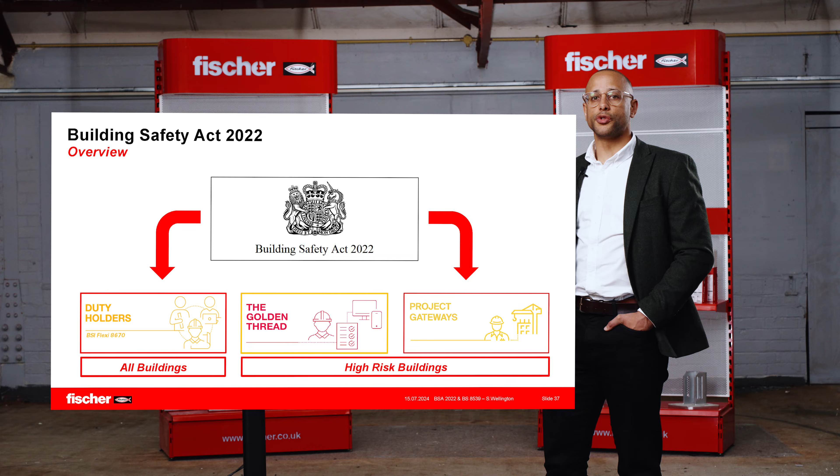Today, we're going to concentrate on 3 key components of the Building Safety Act: duty holder competency, the golden thread, and project gateways. The duty holder competency requirements will apply to all buildings, whereas the other 2, the golden thread and project gateways, will only apply to higher risk buildings.

Overseeing the introduction of the Building Safety Act and the required legislation is the Building Safety Regulator. This will be a division of the Health and Safety Executive and will be responsible for the implementation and enforcement of all the new legislation under the Building Safety Act.

The first of the recommendations we will look at is the golden thread. Following the Grenfell disaster, it was very difficult for the investigators to work out exactly what had gone wrong with the building that led to the tragedy.

The reason for this is that all the safety critical information regarding the building was held on different platforms by different companies, with no one body overseeing all the information. So the purpose of the golden thread is to avoid this happening again. The principal contractor will be responsible for collating all of the safety critical information regarding the design, installation, and certification of all safety critical applications for a construction project.

Next, we'll look at the introduction of project gateways. These project gateways are intended to be checkpoints in a project's lifecycle, and any project that started after October 2023 will be subject to the new gateway procedure.

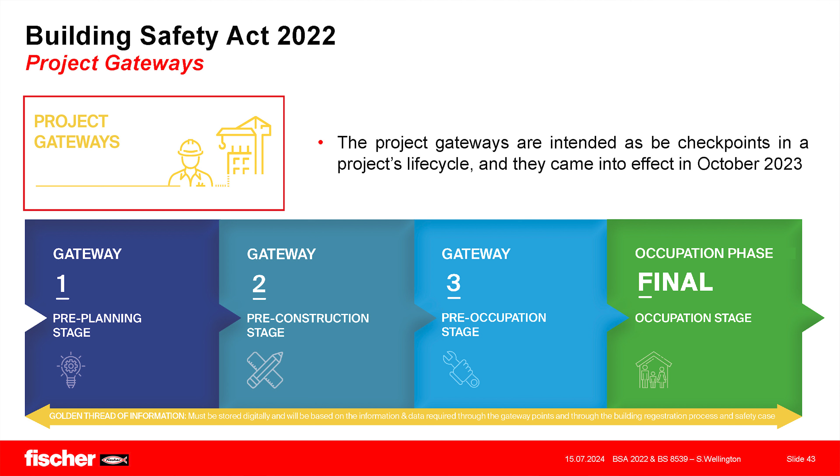Currently in construction, we utilize a project lifecycle of multiple stages. However, it is possible for differing stages to be occurring at the same time. For example, there could be stage 4 design of the building services still being undertaken, with that design not being fully finalized, while at the same time, groundwork, such as the foundations and piling work, are occurring on site.

The big change under the new Building Safety Act is that all detailed design of safety critical applications will have to be completed and approved by the Building Safety Regulator at Gateway 2 before a spade can go in the grounds. This means that there will be greater engagement with secondary contractors and secondary designers at stage 3 and stage 4 of a construction project.

Moving on to duty holder competency. This is another big introduction under the Building Safety Act, that all duty holders on a project will have clearly defined competency requirements set out for them. Under the Safety Act, there are 3 key duty holders, and that is the client, the principal contractor, and the principal designer. All required competency for various parties will be set out in the relevant framework documentation.

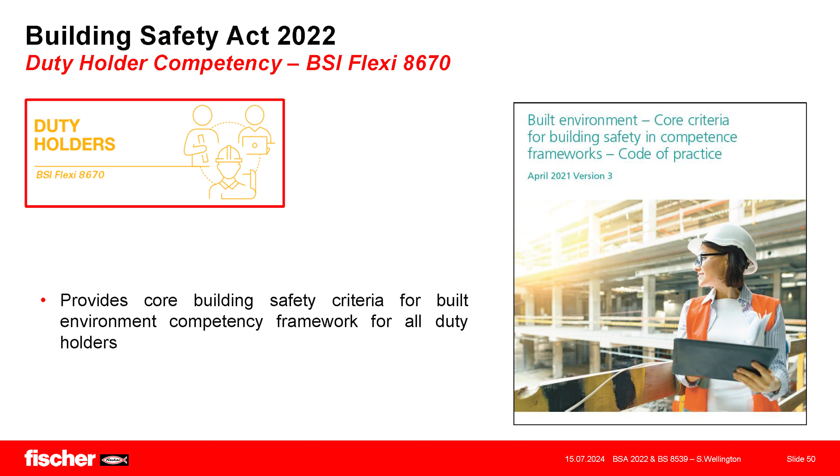The first one of these documents is BSI Flexi 8670, which sets out the core competencies for all working on a construction project. This has been followed up by the framework documentation for principal designers, and they have 3 key responsibilities when it comes to specification of construction products.

First one being the management of all design work for a project. Secondly, they will have to ensure design work compliance across the entire project, so they need to ensure that everybody is designing applications to the relevant design methods. And thirdly, they will be responsible for assisting provision of information to others to ensure that design work compliance. So this is a big change within the industry.

Next, we have the framework documentation for principal contractors. The principal contractor will be responsible for the management and supervision of all building work by adopting best practices.

The best way of achieving this is by following the relevant British standards for various applications on a construction project. Next, they will be responsible for the management of competencies for installers for all safety critical applications. This means contractors will need to develop methods of measuring the competency of installers working on a construction site. And thirdly, they will be in charge of the management of the golden thread.

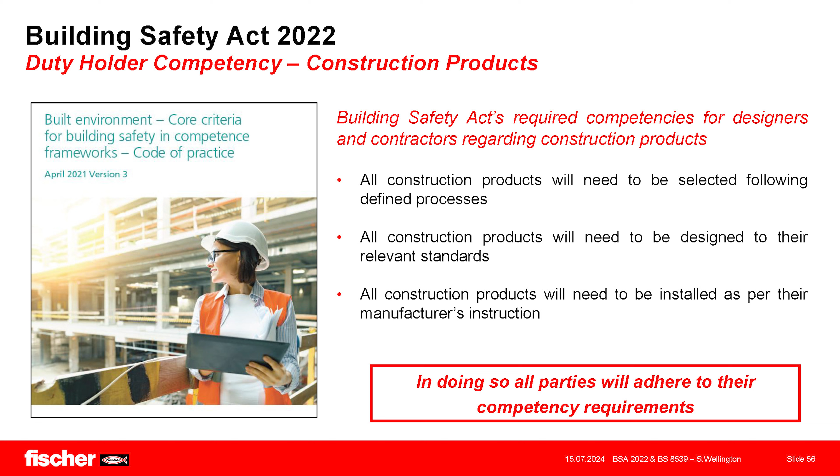Regarding the competencies for construction products, this information is held within BSI Flexi 8670, specifically in section 6.5 and table 5. There's a lot of information in there, but it can be summarized as such: in order to ensure all parties adhere to their required competencies under the New Building Safety Act, all construction products will need to be selected following the defined process. They will then need to be designed following the relevant design method for the application, and finally installed following the manufacturer's instructions. In doing so, everyone would adhere to the required competencies under the New Building Safety Act.

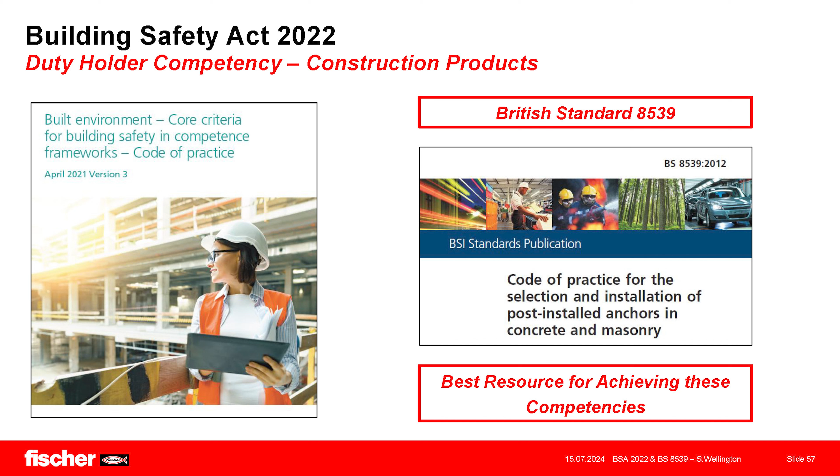And the best way to do that for post-installed anchors is by following British Standard 8539. This will be the best resource you have available to ensure you can adhere to your competency requirements.

Now, to quickly focus on where we are as an industry in regards to the Building Safety Act: as mentioned already, the secondary legislation came into effect in October 2023. And in February of this year, the main steering group behind the development of the legislation of the Safety Act published their latest report, and in it warned that the industry was not ready for full implementation of the Safety Act. There's still a lot of things we need to understand. And as Fischer, we're here as a resource for you to use to understand what you need to know around specification of construction products.

To summarize the Building Safety Act, you need to be aware of all the duty holders covered by the Safety Act and the required competencies of each of those duty holders. You need to know what information you need to submit regarding specification and installation of construction products into the golden thread. And you need to know what you need to achieve by each of the project gateways, specifically around Gateway 2.

I'd like to focus on the importance of post-installed anchors for a moment. We're under no illusion that post-installed anchors are one of the last things to be specified for an application on a project, and they are a low-cost item relative to the rest of the application. However, they have this annoying habit of being the items that keep the application in place and always need to have due diligence paid to them.

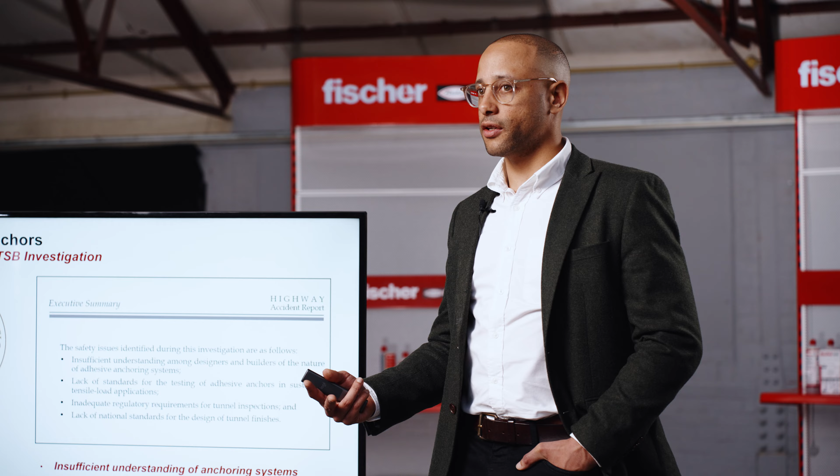Now, when the NTSB, the National Transportation Safety Board of America, investigated what had gone wrong, they quickly identified that the anchors utilized for the suspended ceiling had failed. The reasons for this were numerous and detailed in the report published a year later. The reasons for the failure included incorrect installation, the change of specification without approval, and even when issues were noted on site with the displacement of the anchors, there wasn't the due diligence given to investigate the cause of the problem, and therefore it was believed the problem had been fixed until the tragic accident.

So in the executive summary of the report, it simply stated that insufficient understanding of anchor systems led to the death of the driver of that car. So the importance of the British standard for post-installed anchors is to avoid tragedies such as the Big Dig and others that have occurred even in this country, even up to the modern day.

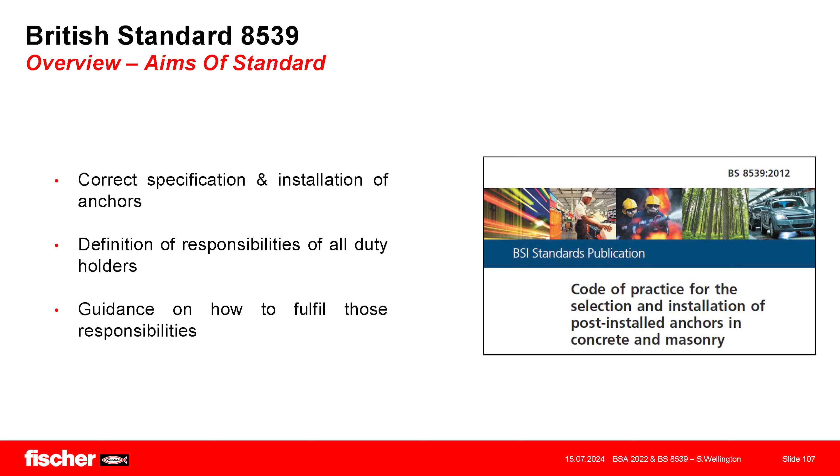So the use of such a standard can avoid these issues by ensuring correct specification and installation of anchors, clear definition of the responsibilities of duty holders. The standard will also provide guidance to the duty holders on how to fulfill their responsibilities. The key duty holders under the British standard are the specifier, the contractor, and the installer, with the contractor having overall responsibility for the installer.

Key points that all duty holders should be aware of: for any safety critical application, an anchor with a European Technical Assessment approval must be used. If there is any change to the specification, procurement, or installation of a post-installed anchor, then the original specifier or an engineer with access to the original design data must be notified and approve of the change.

Also, all duty holders should be aware of the information they are responsible to pass on to other duty holders to ensure the correct specification, procurement, and installation of anchors.

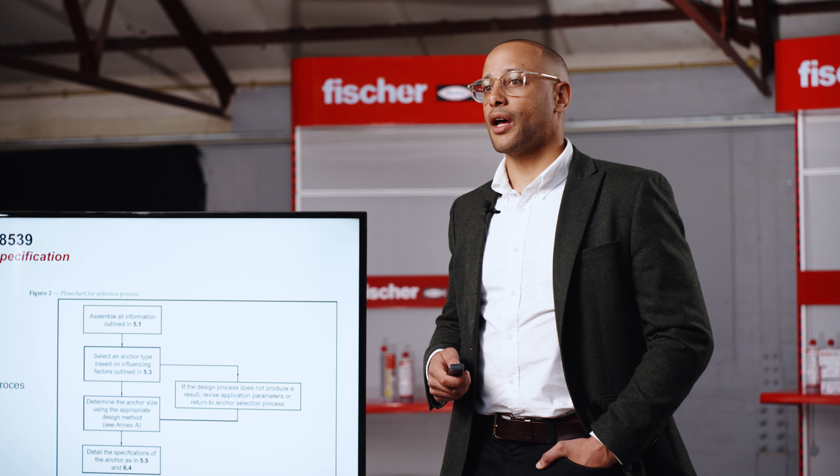Focusing now on specification. Within section 5 of the standard, it gives you all the information that you need to ensure that you specify an anchor correctly. As you can see here, it even gives you a flowchart on how to follow the specification process.

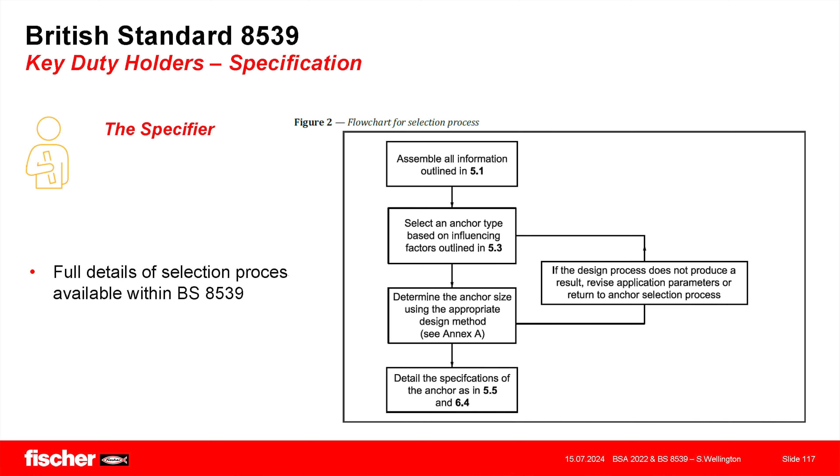If we focus on the first section of that, which is the information required for the initial selection of an anchor, as you can see, it is an extensive list. Now, we don't always get that information, but the more information specifiers can have from this list, the easier and quicker the job will be.

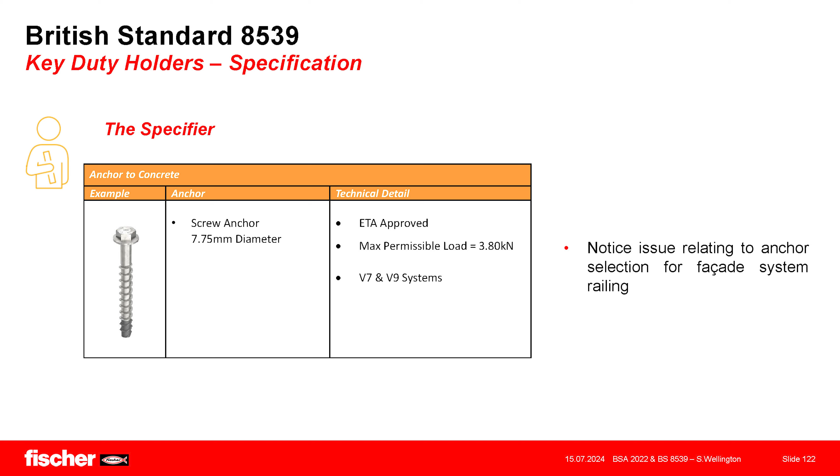So to highlight the importance of having as much of this information as possible, we're going to look at a quick example. Here we've taken this example from a facade railing system. For this particular system, the specifying engineer recommended the use of a 7.75 millimeter diameter screw anchor that was ETA approved and had a max permissible load of 3.8 kilonewtons.

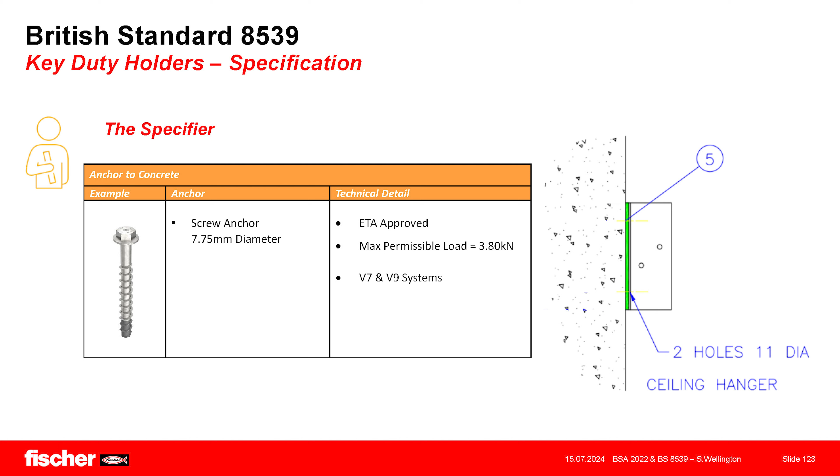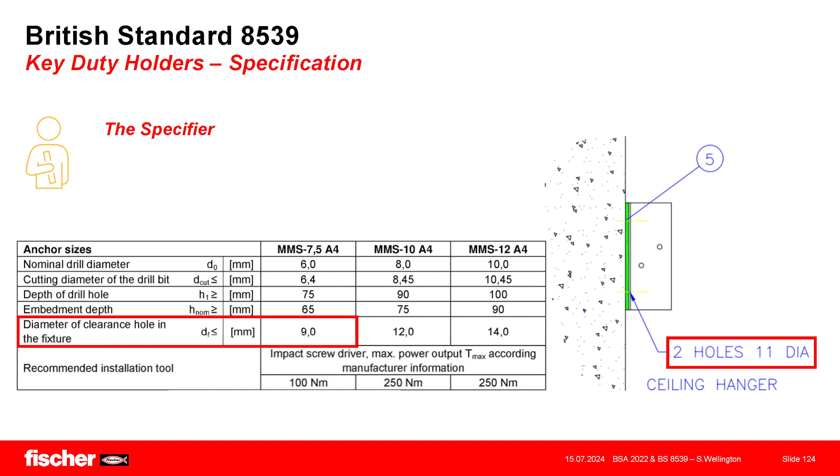However, the bracket that the anchor was to be installed into had clearance holes of 11 millimeter diameter. Now, this is a problem because if we look at the ETA approval for the anchor, for the 7.75 version, you can see highlighted here that the maximum diameter of clearance hole is 9 millimeters. This is to ensure that the load is transferred from the base plate to the anchor as expected under the Eurocode 2 Part 4 design methods.

So unfortunately, for this particular example, the 11 millimeter clearance hole was too large, and this is an example of incorrect anchor selection. Once the specifier has selected an appropriate anchor for design, they then need to work out which design method they should utilize for the connection in question.

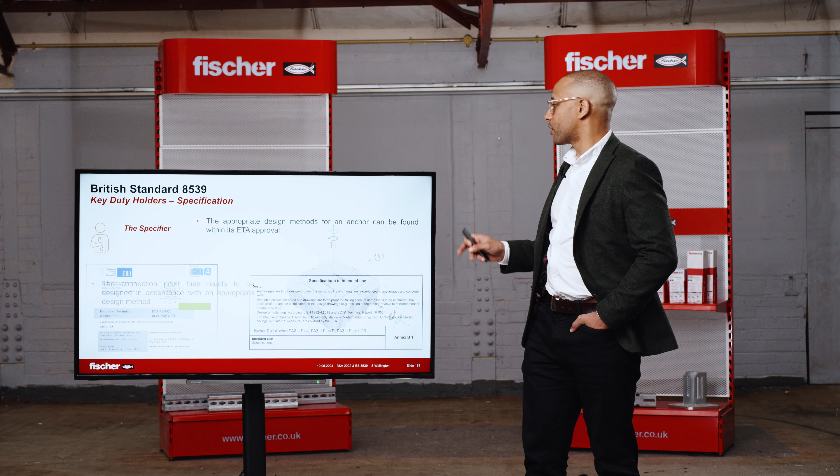The quickest way of doing that is consulting the ETA approval of the anchor and looking in the specification of intended use section, where it will always give what design method the anchor should be designed in accordance with. So here, we've got FAZ II Plus, and it's intended for design with Eurocode 2 Part 4.

And the easiest way to do that design is to utilize an anchor design software, such as Fischer's C-Fix Design Suite.

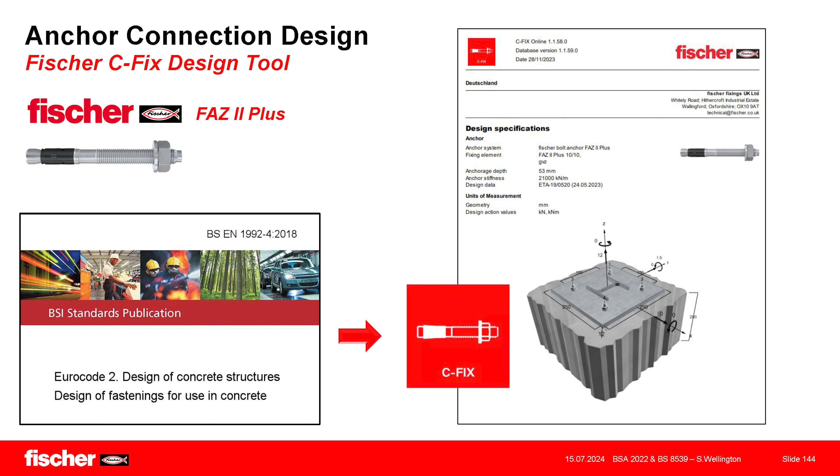Within it, you can design the anchor and then publish a design report, and this will be important for the Building Safety Act for that design work compliance, because within the report, it will state what ETA approval has been utilized for this anchor, so that's where the characteristic data used for design has come from, as well as detailing which design method the anchor has been designed with for this particular design.

Also within the report will be a full breakdown of the verification calculations for anchor failure.

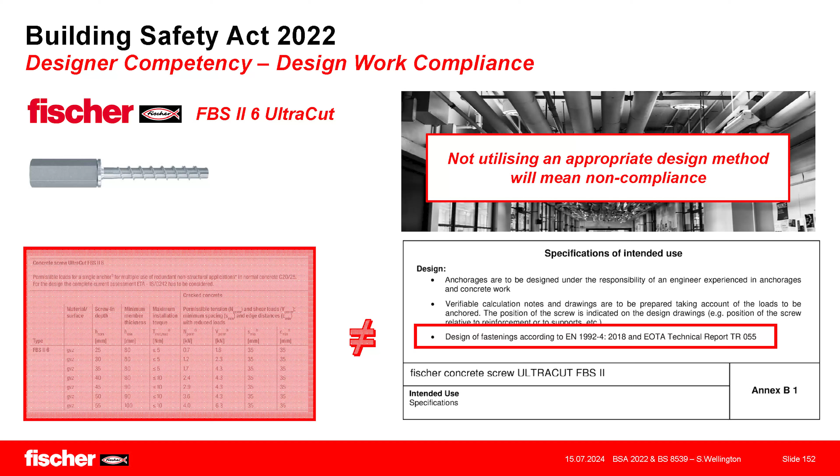What shouldn't happen is the use of load tables. Now, we publish load tables to help with the selection of the anchor, but not for design. The intention of them is to give you an idea of the load capacity that could be possible with the anchor in question. What should never ever happen is that justification for an anchor connection design be made solely on the basis of the loads given within the load table.

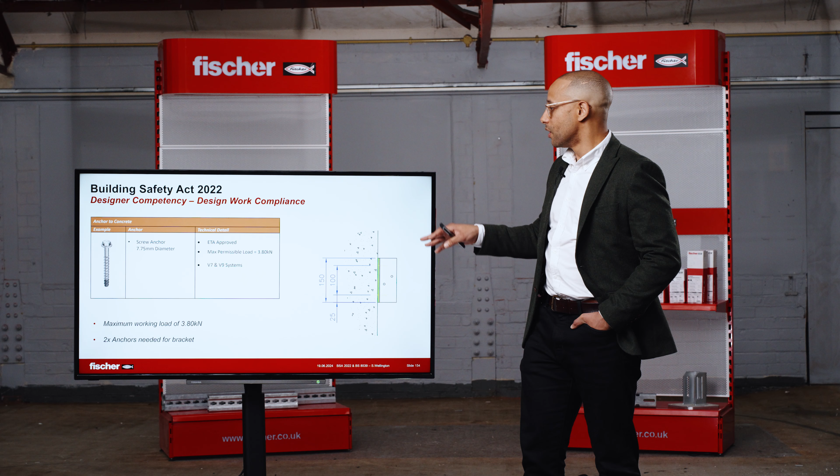Again, we will revisit our facade example, again with our 7.75 millimeter diameter screw anchor. As I mentioned before, the specifier stated that had a max permissible load of 3.8 kilonewtons, which they took from the load table for this specific anchor.

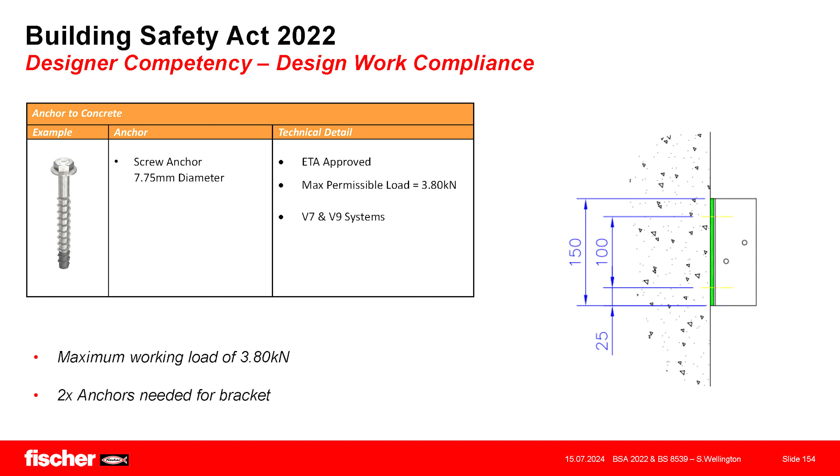And for the bracket that we're considering, there were 2 anchors to be used for that particular bracket. The first issue here is that the 3.8 kilonewton load that they have said is the max permissible load is only applicable in tension according to the load table and for non-cracked concrete only. But as we know, the assumption should be made that all concrete is cracked unless proven otherwise.

So as we can see, the specifying engineer worked out what load would be applied to the bracket, but instead of carrying out correct anchor design, what they did instead was simply times that max permissible load by 2, the amount of anchors they had in the bracket, and decided that that would be the maximum load capacity of the particular bracket, which unfortunately is incorrect.

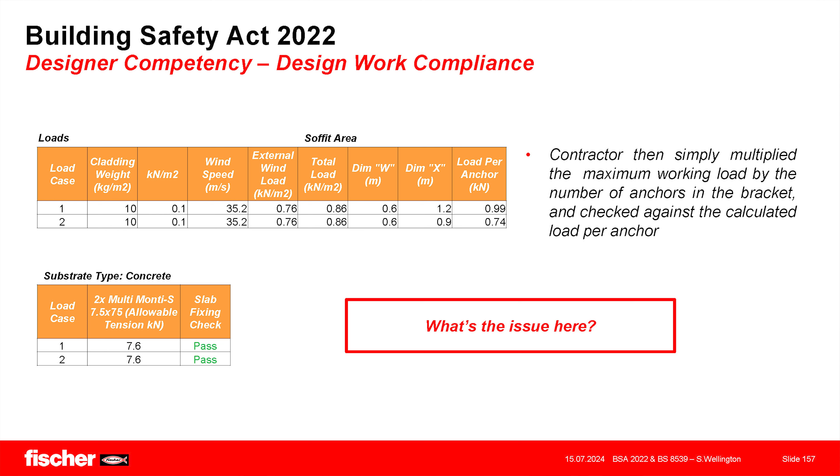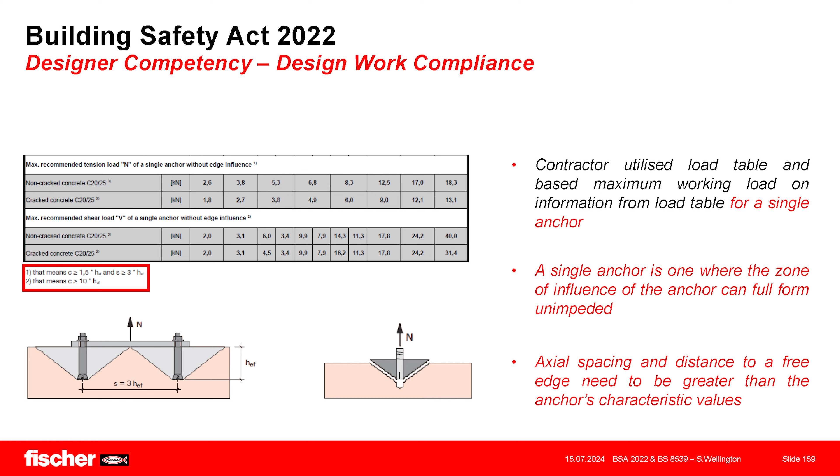Now, why is this incorrect? Because it doesn't take into consideration the fact that the anchors are closely placed to one another. So their zones of influence, this is the area of the concrete where it gets its load bearing capacity, will overlap, which will decrease the max permissible load of the anchor.

Unfortunately for the designer, as we can see again from the ETA, it states that its characteristic spacing, the spacing at which anchors can be considered as single anchors, is 3 times the embedment depth. In this instance, the embedment depth is 40 millimeters, so the characteristic spacing is 120 millimeters. As we can see here, the actual spacing for the bracket is 100 millimeters.

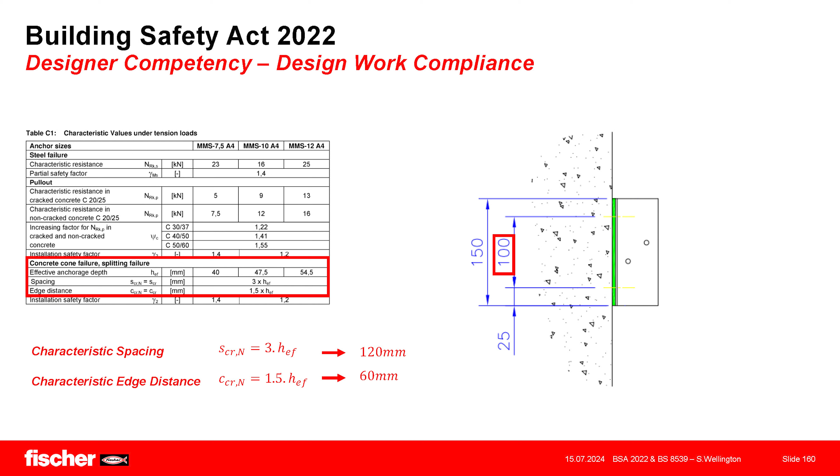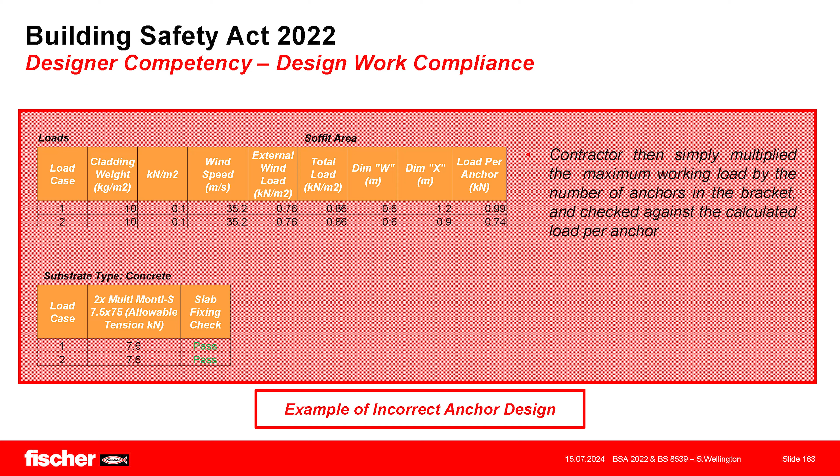So this has to be considered as an anchor group. As an anchor group, the zones of influence, as you can see in the figure here, overlap, and this is why we need to utilize correct design methodology to work out the actual load bearing capacity of the anchors, rather than simply timesing the max permissible load by the number of anchors in a bracket. So unfortunately for this specifying engineer, this is an example of incorrect anchor design.

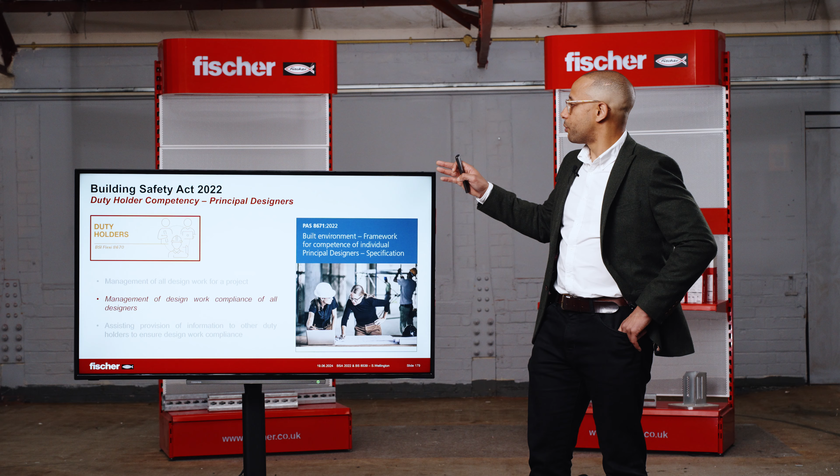Now, how does this tie into the Building Safety Act? Earlier we went through the principal designer's main requirements regarding their competency, and one of them was the management of design work compliance for all designers. So essentially, if the designer of that facade system had submitted that anchor design to the principal designer, it would have been rejected and they would have been asked to redo it utilizing the correct design method.

So we'll have a look at what design methods should be used for both concrete and masonry, the two main substrate types for post-installed anchors.

For concrete, this is managed by the European Commission, and as I mentioned before, the main design method is Eurocode 2 Part 4. There are various design methods under it, and it also covers dynamic, seismic, and fire approvals. A sub-design method is CEN Technical Report 17079, which looks at anchor redundancy for overhead systems. Finally, we have our own Fischer ENSO design methods, which are based upon FIB Bulletin 58.

A limitation of Eurocode is it allows for only 9 set anchor layouts, and there will always be a requirement for custom anchor layouts, and that is managed by the Fischer ENSO design methods.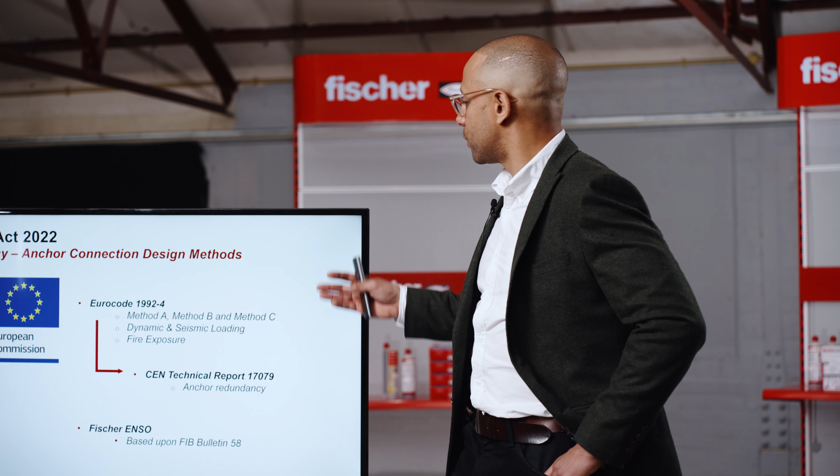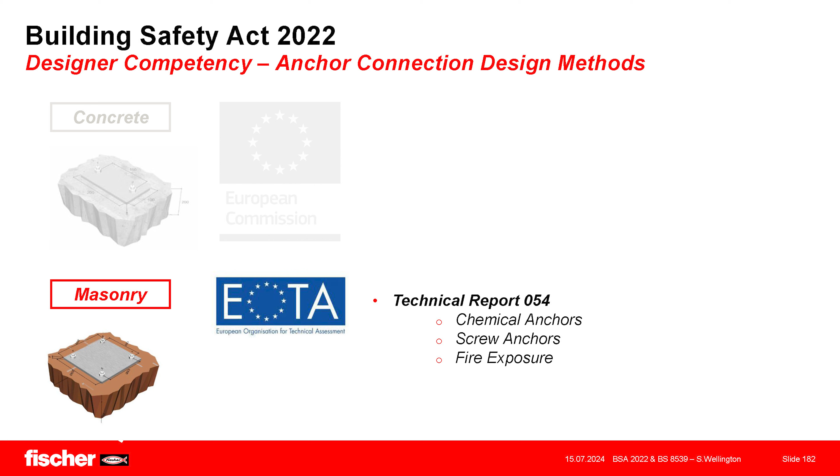Moving on to masonry, this is looked after by the European Organization for Technical Assessment, the body that issues the ETA approvals, and the design of masonry is covered in Technical Report 54, which covers design for screw, chemical, and fire.

Moving on to key duty holder responsibilities under procurement. The contractor has the main responsibility for procurement, as well as ensuring that the anchor is installed correctly. This is achieved by following the specifier's specification and anchor connection design provided to them, and then ensuring that the installer has all the correct installation equipment, as well as sufficient training on the installation of the anchor.

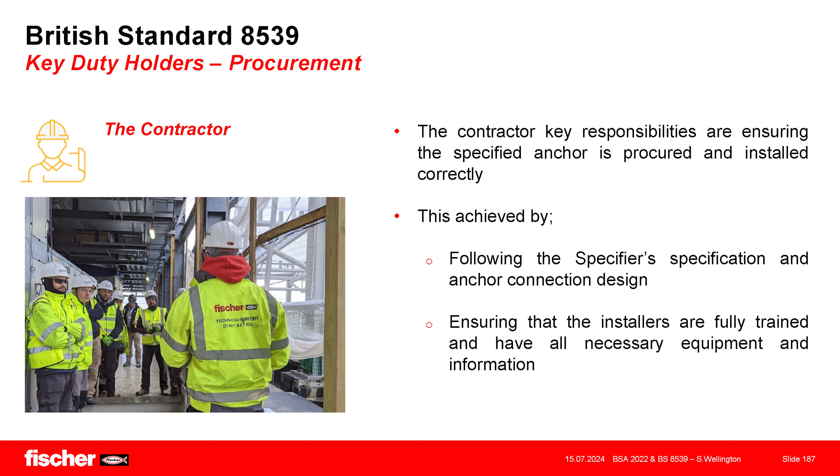To aid the contractor with their procurement and installation, the specifier must provide them with the following information. Firstly, a fully detailed design and drawings of the anchor connection. Then a detailed specification of the anchor system, as well as the required installation accessories. And finally, they need to ensure they've got installation instructions from the anchor manufacturer that they can use to train the installer.

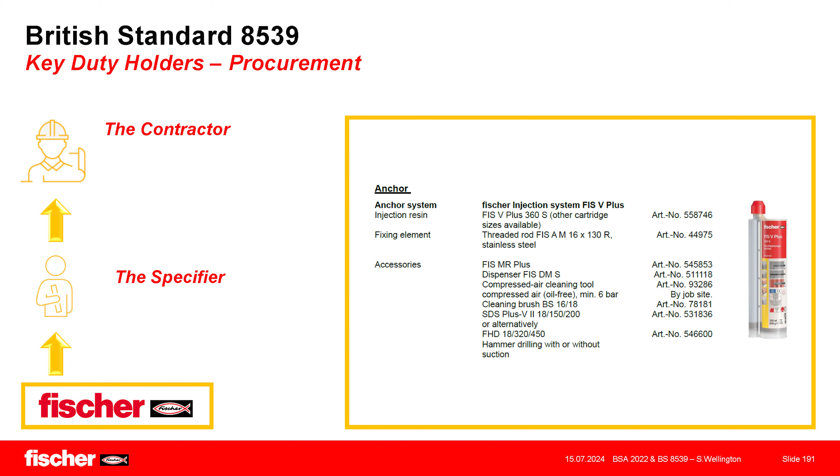The best way for them to do this is to issue the contractor with a C-FIX design report, as well as the ETA approval for a Fischer anchor. The reason being, within the C-FIX design report, there's a breakdown of the anchor system and required installation accessories, including the article numbers if it's an item that Fischer supply. And there's also detailed installation instructions.

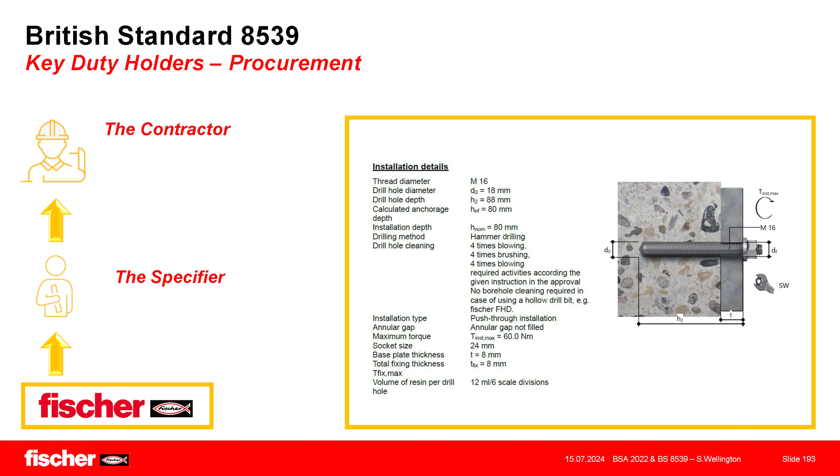So for this chemical anchor, we know how deep the installer needs to drill into the concrete, the exact cleaning procedure for this anchor, as well as the amount of scale units of chemical resin that needs to be injected into the drill hole. All key information the installer needs to know to ensure the anchor is installed correctly. Finally, within the ETA, you have step-by-step instructions on how to install the anchor.

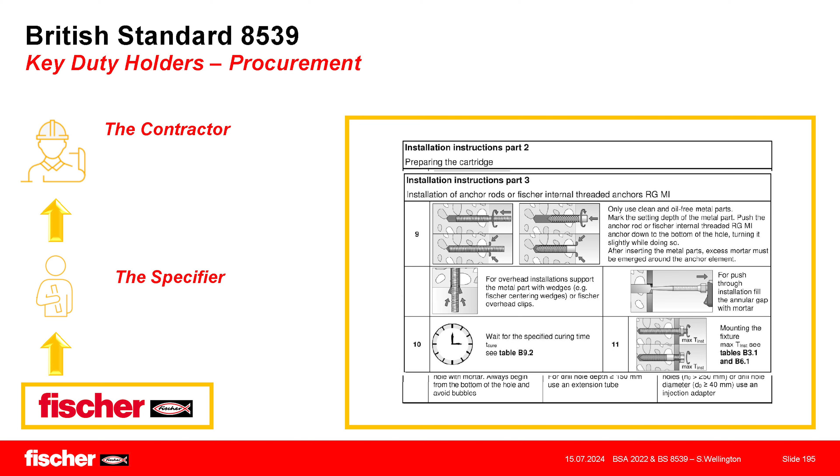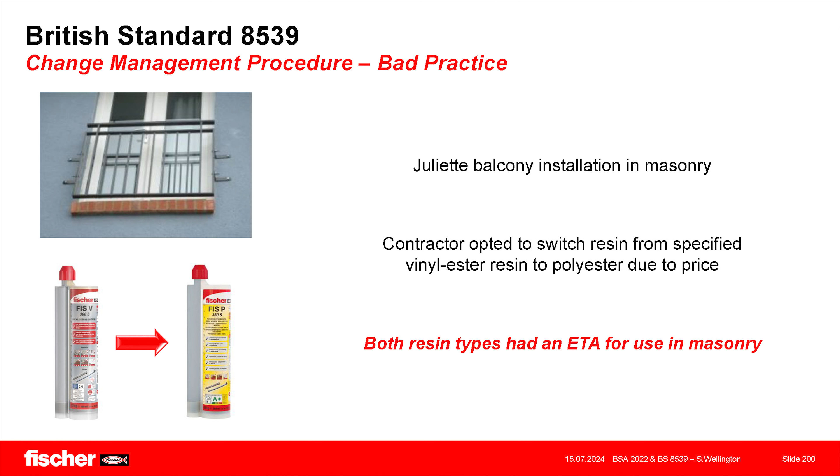Now, the contractor opted to switch from the specified vinyl ester chemical anchor system to a polyester anchor system based on price. And they justified it by saying that both the vinyl ester and the polyester chemical systems had an ETA approval for use in masonry.

Unfortunately, the anchors failed when a man came and leaned against the side of that Juliet balcony. The anchors failed, the balcony fell away, and he fell to the ground, breaking both of his legs.

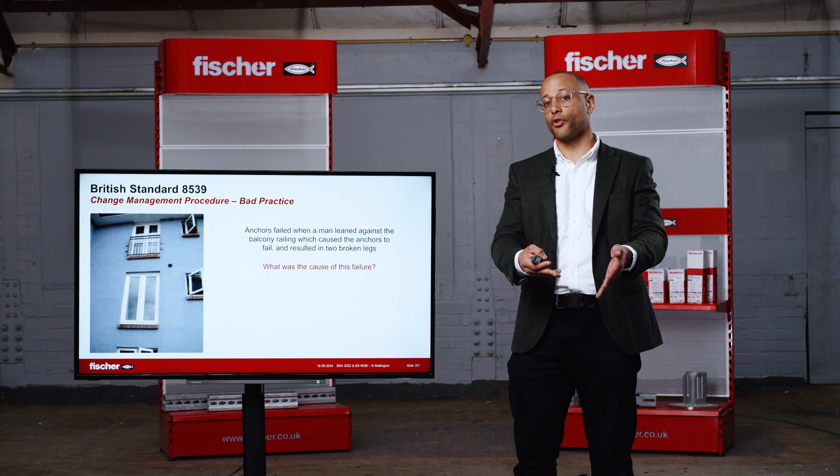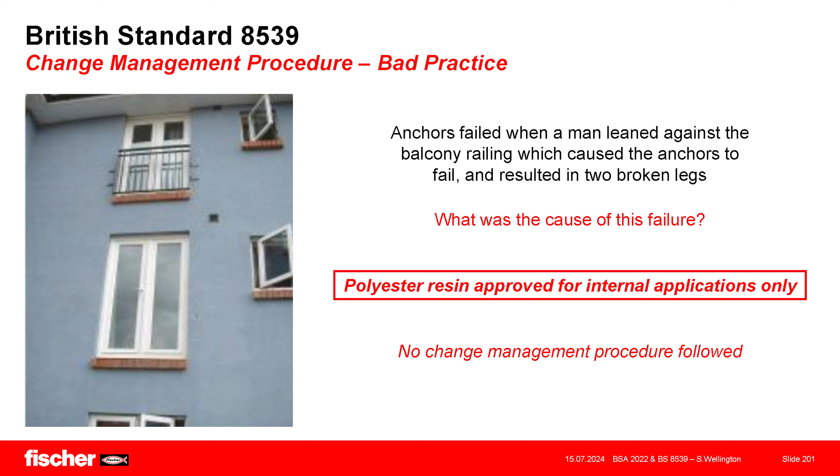Now, what was the cause of this failure? It was the fact that the polyester resin, while it did have that approval for use in masonry, the approval was for internal use only. That was because the polyester resin in question was adversely affected by even the moisture in the atmosphere, greatly reducing its bond strength capacity.

So no change management procedure was followed, and that resulted in this man unfortunately breaking both of his legs. While the standard does state there is a need to change specification, those specifications should always be done either by the original specifying engineer or by another engineer who has access to the original design data so they can replicate the original design for the newly specified anchor.

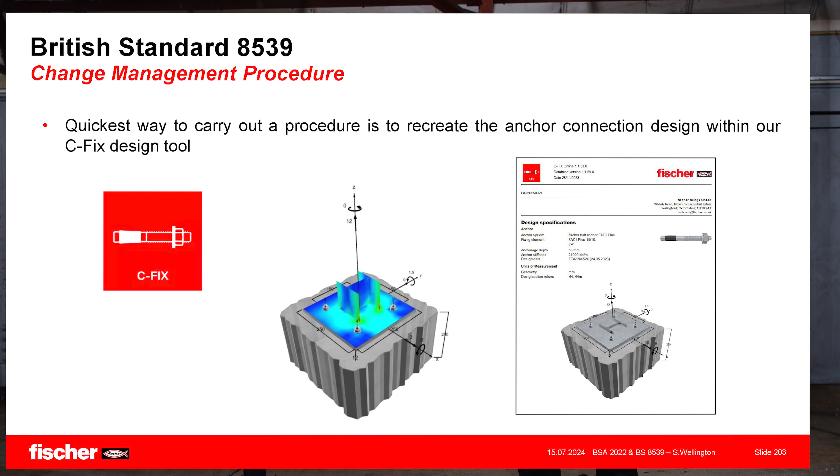The quickest way to carry out a change management procedure, as I say, is to simply recreate the anchor connection design with our C-Fix design tool if you wish to use a Fischer anchor.

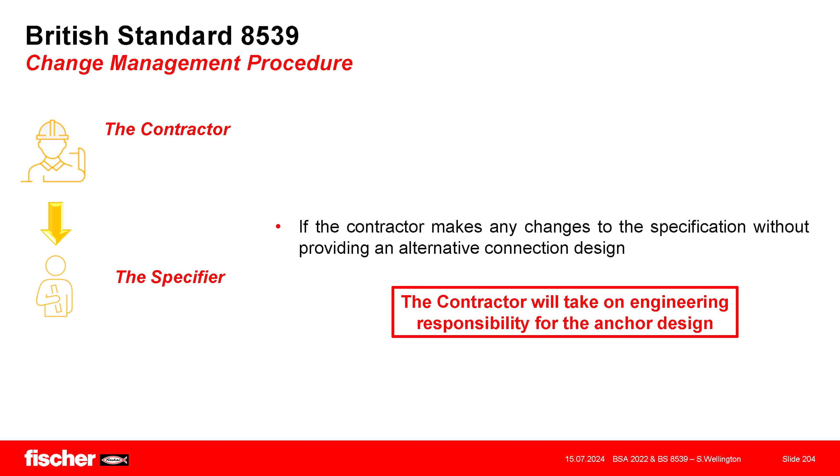If anyone other than the original specifying engineer or a newly appointed responsible engineer makes the decision to change the specification of an anchor, then they will be taking on engineering responsibility. So for the example we just looked at, the contractor would have overall responsibility for that anchor connection and therefore the failure of that anchor.

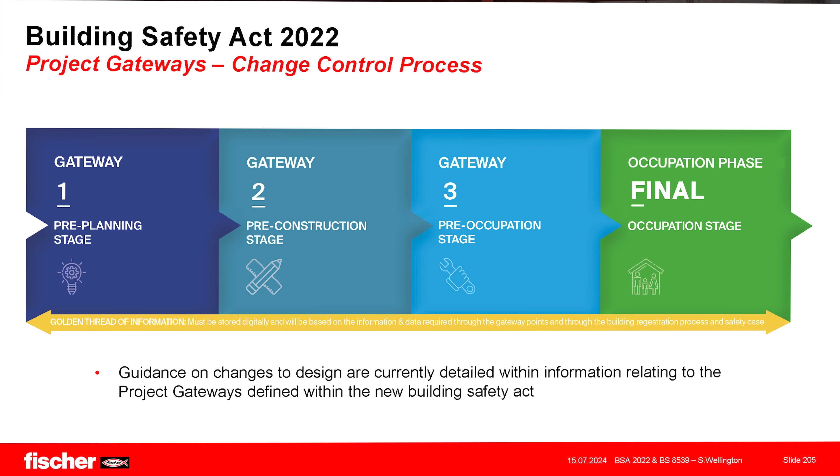Now, how does this tie back into the Building Safety Act? Well, as we spoke about before, there is a requirement for any changes made to specification following Gateway 2 to be captured within the golden thread via change control process log.

As a recap, the client will be required to submit a detailed design at Gateway 2 to the Building Safety Regulator for approval. So this will effectively be the document that will state this is how we are going to build this particular building. This involves a detailed review of the construction plans, materials, and safety measures. The BSR will then have to give their approval, and only after that approval can construction begin.

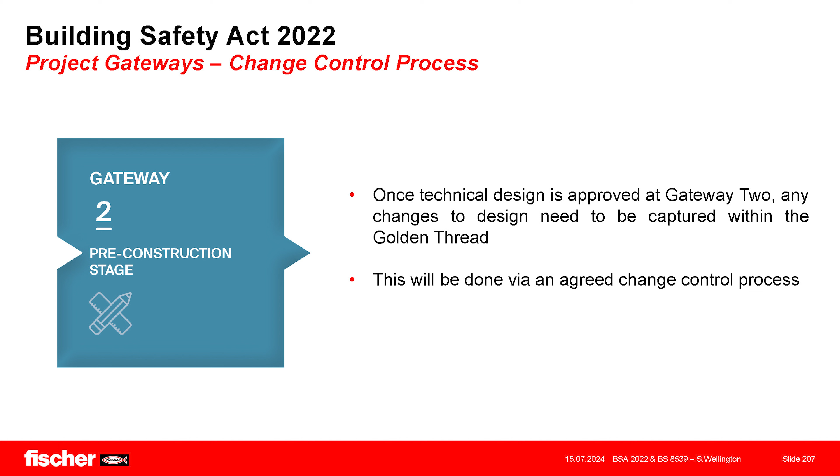Following the start of the project and progression through Gateway 2, any changes to the design or product specification will need to be captured within the golden thread via the change control process log we mentioned before.

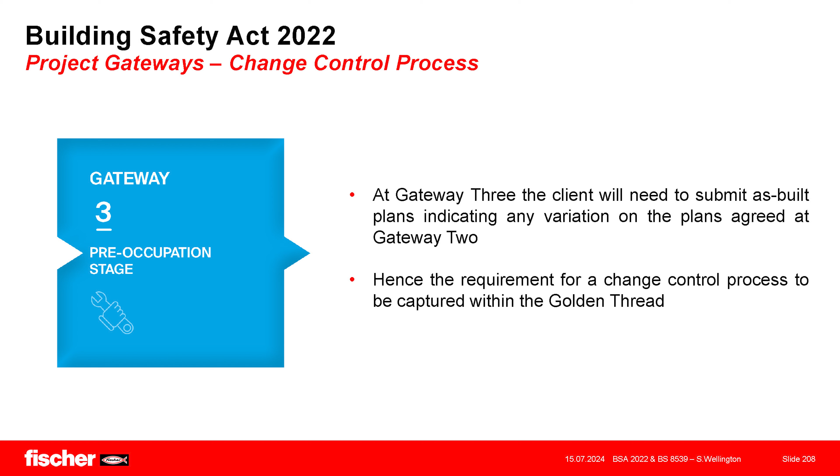At Gateway 3, the client will then need to submit an as-built document to the Building Safety Regulator, and the regulator will compare that against the document submitted at Gateway 2 and then refer to the change control process log within the golden thread to ensure that if there have been any changes to any design or specification, they followed the correct procedure. And that procedure for post-installed anchors is the one we looked at from British Standard 8539.

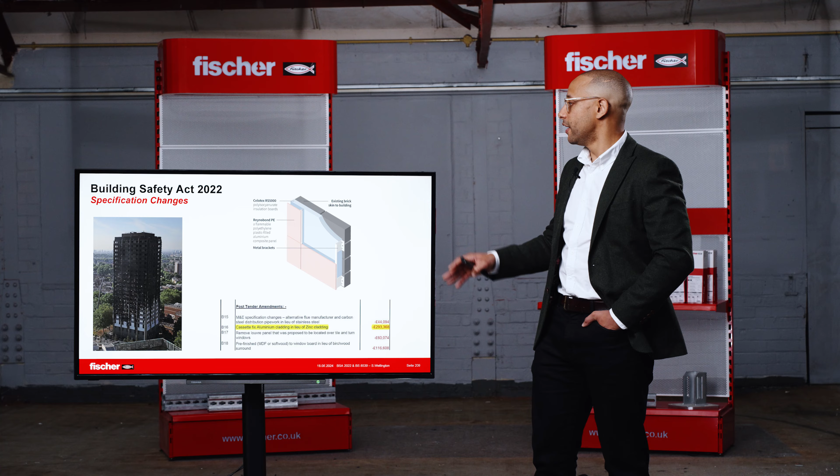Now, the reason for all of these requirements around change management procedure and control process logs regarding product specification is a direct result of Grenfell. I think most people are aware that one of the major reasons for the Grenfell disaster was the change of the specification of the facade paneling to one that was not suitable for the fire requirements of the building.

Following the Grenfell disaster, the Construction Products Association and NBS carried out a survey on product specification, and what they found is that from their respondents, only a third of them said that whenever they carried out a change of product specification, they always got approval for that change.

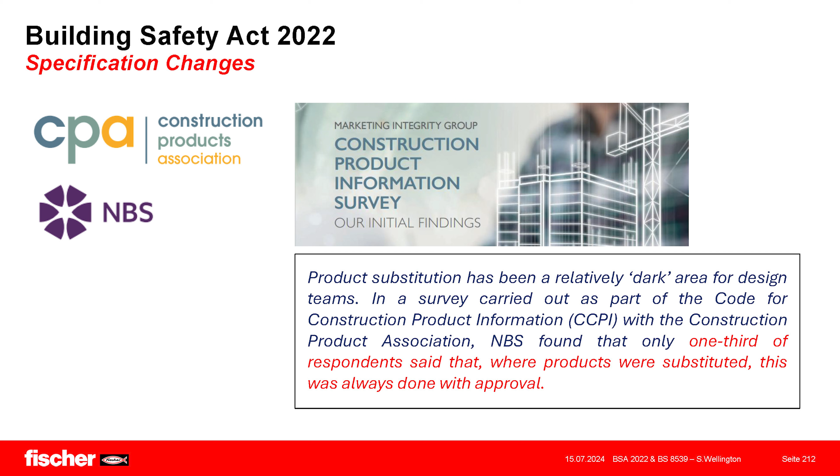Now focusing on the control process under the Building Safety Act in a bit more detail. Within the Building Safety Act, it makes clear that any change to a specification needs to be detailed as either being a major, notifiable, or recordable change.

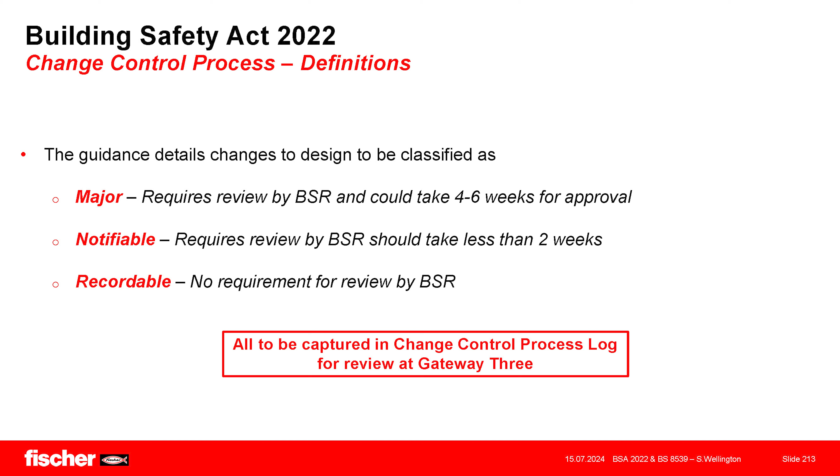A major change requires approval from the Building Safety Regulator and can take up to 4 to 6 weeks. Notifiable changes also require approval from the BSR and should take less than 2 weeks. Recordable doesn't require any involvement of the regulator. However, both the principal designer and contractor have to approve of the change. And all of these changes have to be captured within the control process log for review at Gateway 3.

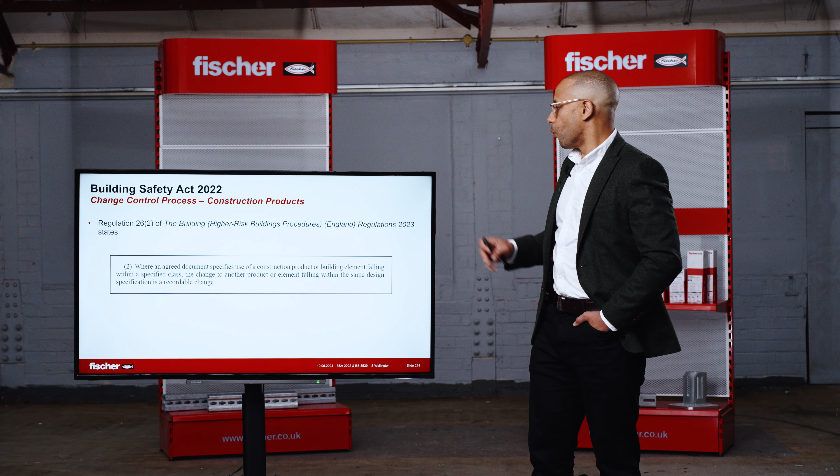For construction products, Regulation 26.2 states the following: when an agreed document specifies use of a construction product or building element falling within a specified class, the change to another product or element falling within the same design specification is a recordable change.

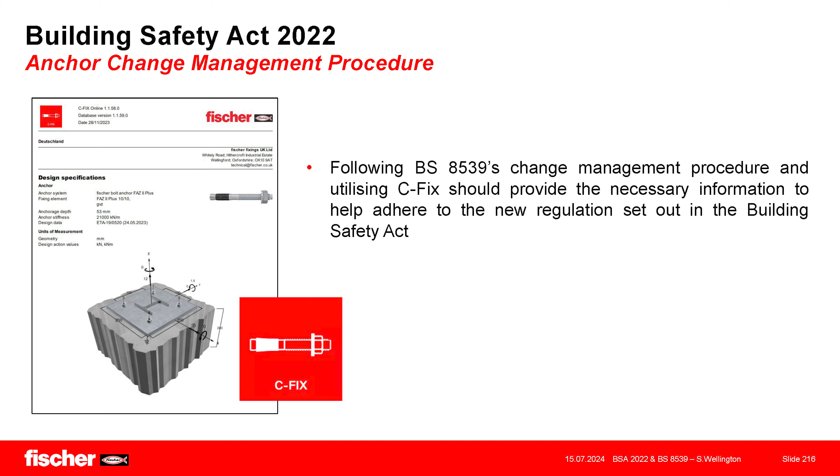So in short, all changes of construction products after Gateway 2 are a recordable change. Any change to a product specification has to be approved by the principal designer and the principal contractor. As mentioned, for post-installed anchors, following BS 8539's change management procedure will ensure that you adhere to the new requirements set in place by the Building Safety Act regarding product specification change.

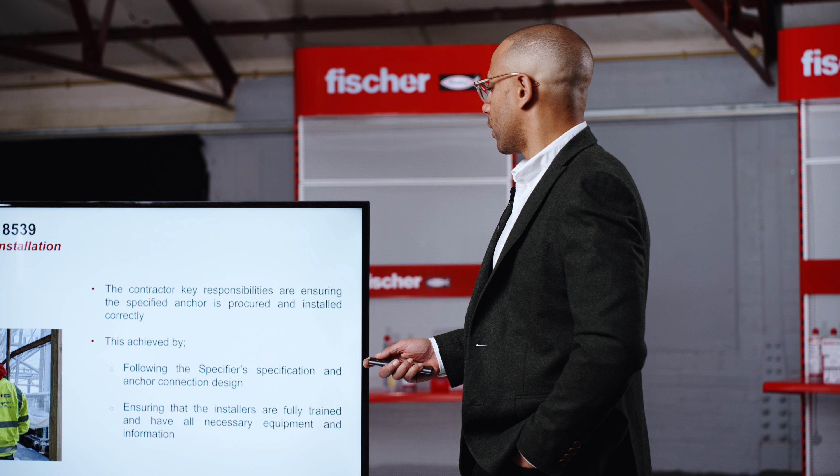Now focusing on installation of post-installed anchors. As we looked at before, the contractor has overall responsibility for installation as well as overseeing the installer's practice. In order to achieve that, they need to ensure installers are fully trained in how to install the anchor and have all the correct installation accessories available to them. It is imperative to ensure the installer has had necessary training via an anchor toolbox talk from the manufacturer. This can be done online or in person.

If the installer does not install the anchors as per the manufacturer's guidance and to the specified design, then the installer themselves will be taking on responsibility for that anchor connection, and by default, the contractor, because as we say, the contractor does have overall responsibility for the installer.

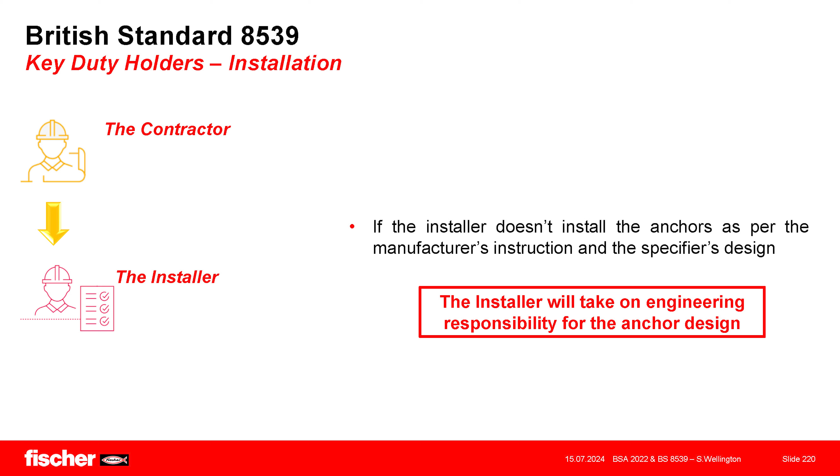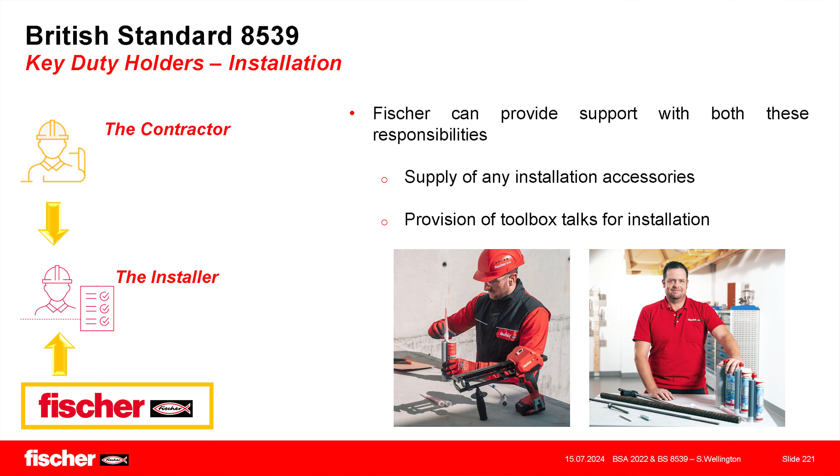To help support contractors and installers, Fischer always make available as many of the installation accessories required for installation, as well as the provision of toolbox talks either on site or via our online platform. We can also provide training for supervisors to oversee the installation of anchors. And this all ties back into the Building Safety Act, as the principal contractor has a responsibility to ensure the management of the competencies of installers of safety critical applications.

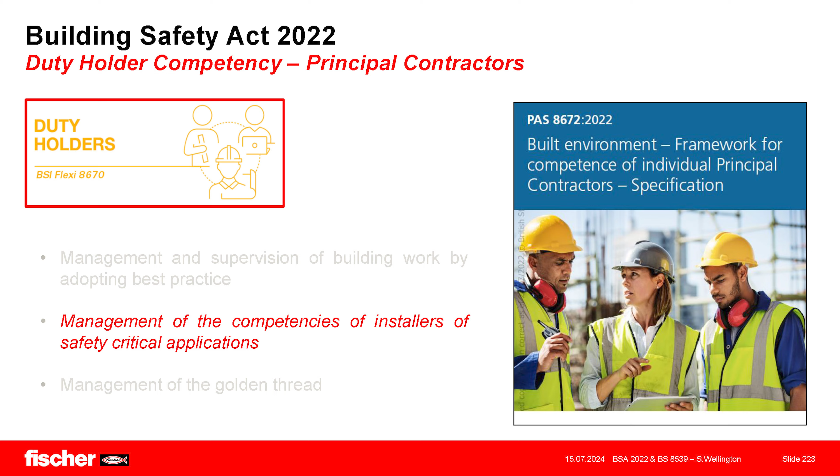So what this means is the contractors will need some form of record to ensure that the installer of post-installed anchors has had the necessary training to ensure they will install that anchor correctly. To help contractors adhere to the new competency requirements regarding installation, Fischer can come to site to provide toolbox talk training. We also make information required for correct installation available from our C-FIX design report and ETA approvals.

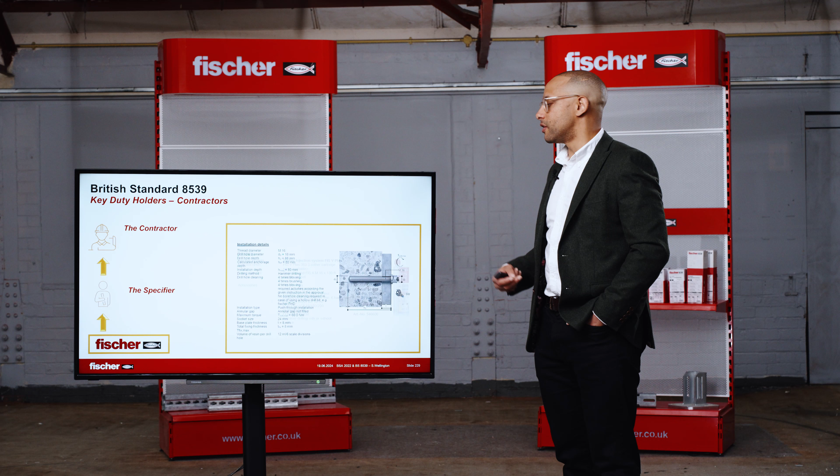Within the C-FIX design report, there is a breakdown of all components of the anchor installation system and required installation accessories, as well as detailed information on how to carry out the installation. Within the ETA, you then have the step-by-step guide on how to correctly install the anchor in question.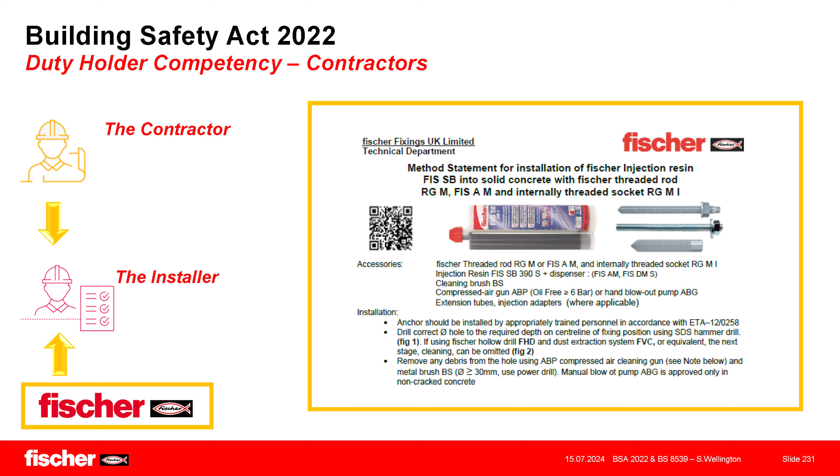We also can make available dedicated method statements for particular installations for contractors. And we have our online training portal where we have an array of online toolbox talks, and we can also set up contractor-specific online portals so we can generate databases of installers who have undertaken the training to make that available to contractors.

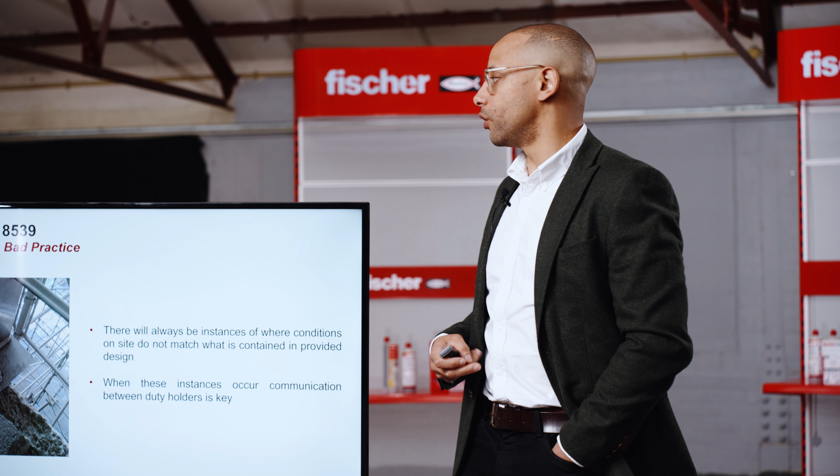So to highlight the importance of anchor installation, we're going to look at a few bad practice examples. There will always be instances on projects where the conditions on site don't match up to what's within the design. For example, concrete upstand being out of tolerance. In these instances, the communication between the duty holders to ensure the anchors can be installed correctly becomes absolutely paramount.

For a first example, we have this collapsed air conditioning unit. While there wasn't any issues with the concrete it's been installed into, as you can see here, no amount of PPE was going to save any workman stood underneath that unit when it came down. Luckily, it came down overnight when nobody was on site.

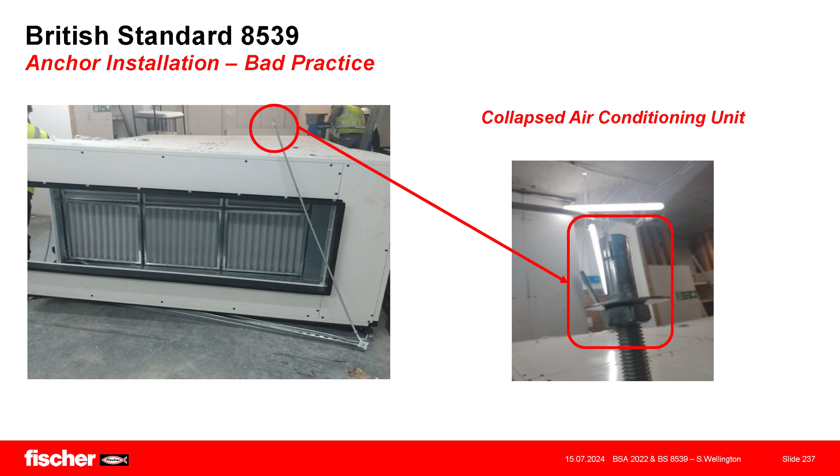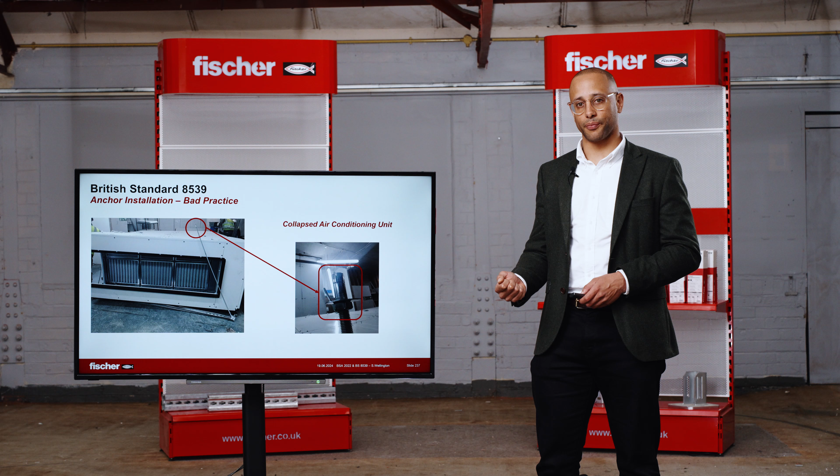Now, the anchor that is highlighted here is what we call a hammer set drop-in anchor. These anchors need to be set with the appropriate setting tool to ensure that the expansion element of the anchor fully expands into the drill hole. Unfortunately, on this project, you can see that this anchor has barely expanded, and that's because they were using a bit of threaded bar to set the anchor. So this highlights the importance of ensuring that the installers have the correct installation accessories on a project.

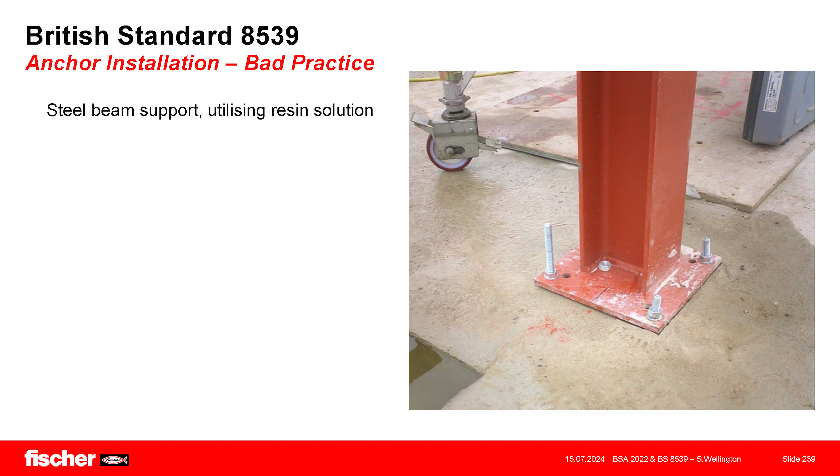Next, we've got a steel beam support utilizing a resin solution. As we can see here, we have one that is sticking out by a considerable amount compared to the others. Now, the reason for this is because they've hit rebar. So there's shallow rebar in this concrete slab, which wasn't considered during the design of the anchor.

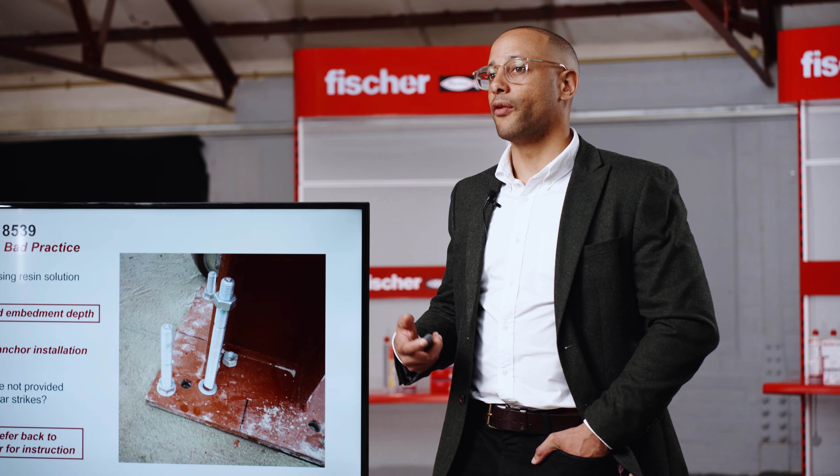And unfortunately, when the installers hit the rebar, they have a tendency to install the anchors at that depth. Now, the problem here is you're reducing the load bearing capacity of the anchor, and you're also changing the installation from what has been specified in the design. So as I said before, this will mean that the installer will be taking on responsibility for that connection design, because effectively they have changed it and not had it approved by the designer.

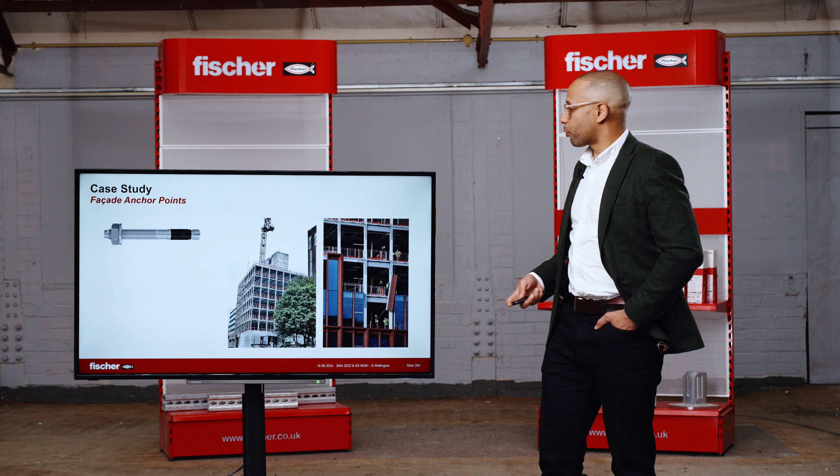Now we're going to look at a quick case study of a facade anchor point. For this particular project, our involvement began when the supervisor on site called us up to say that our anchors were failing during installation.

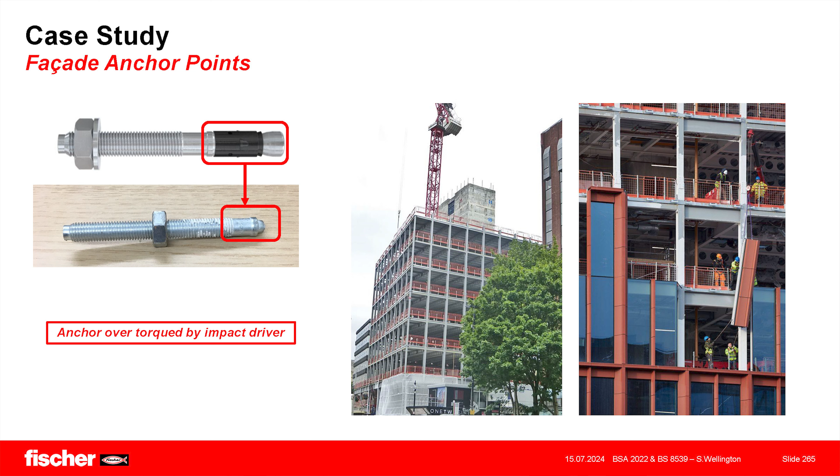Now they sent through this photo of our anchor, and you can see here it is snapped at the location where the expansion clip is. The reason for this is because they were over torquing the anchors. They were utilizing impact drivers rather than calibrated torque wrenches, because all torque controlled expansion anchors require a set installation torque, which cannot be achieved with impact drivers.

However, I did go to site to investigate further, and there were other issues that I discovered. Here is one of the connection points for the facade frame, and unfortunately, it transpired that they were utilizing cast-in channels with post-installed anchors. Now, unfortunately, while Eurocode 2 Part 4 does cover the use of post-installed anchors and cast-in channels, it doesn't allow for design of both for a single application.

So to clarify, for an application, you must use either a post-installed anchor solution or a cast-in channel solution. The reason we have both here was the intention for the post-installed anchors was that they were to be used as a backup if the cast-in channel had been installed in the wrong location.

An additional issue with utilizing post-installed anchors and cast-in channels in this particular scenario was the fact the post-installed anchors were located far too close to the cast-in channel. So when the anchors were then over-torqued by the impact drivers, it was causing the concrete between the cast-in channel and the post-installed anchor to begin to crack.

Now, unfortunately, what this means for the connections affected is that essentially this connection point was unsafe and needed to be replaced. There were additional issues with the connection points that I reviewed.

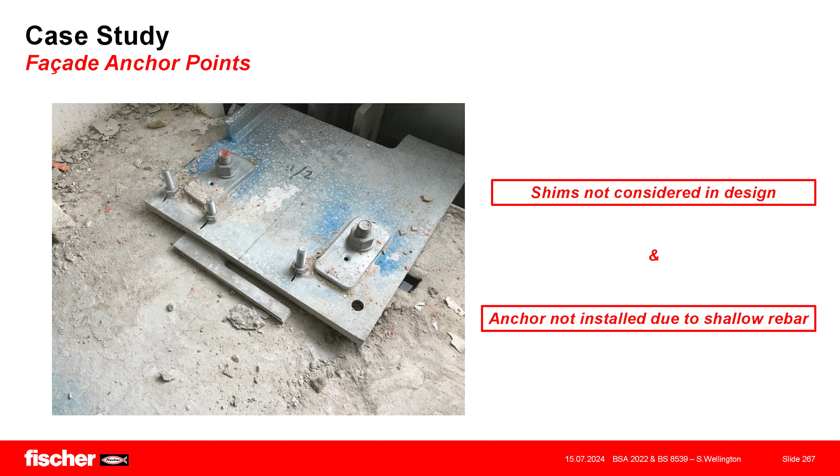So as we can see here, you've had the addition of shims that were not included in the original design. If shims are ever to be used with an anchor connection point, then they need to be included in the design of it. The reason for this is it will affect some of the failure mode verification calculations. So this is why it has to be detailed.

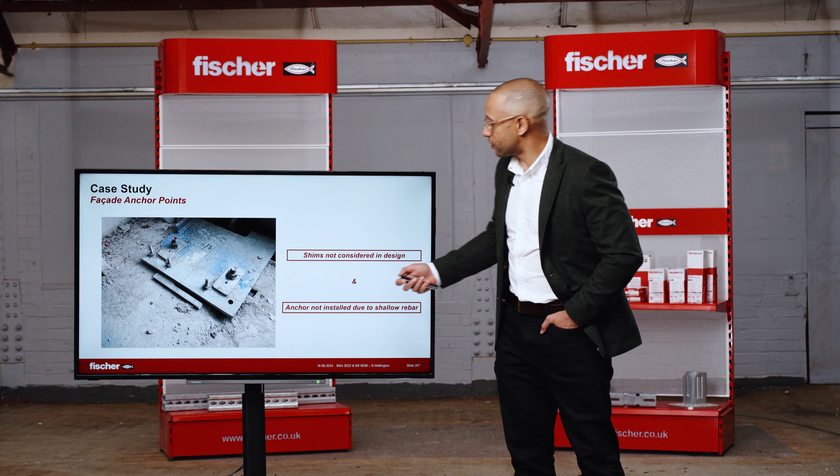Also, as we can see here, there's an anchor missing from the installation, and this was due to the fact that, again, they were hitting rebar at a shallow depth. In this instance, they did flag it to the supervisor, and this was something that we discussed on site along with the other issues highlighted.

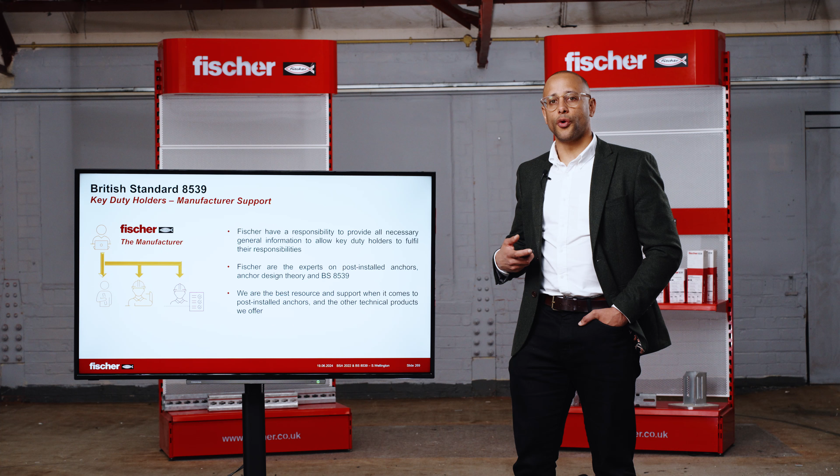Under the British standard, anchor manufacturers are also classed as a key duty holder. This is because we have all of the information required by the other duty holders to ensure they fulfill their responsibilities as advised by the British standards. At the end of the day, Fischer are experts in post-installed anchor connections, anchor design theory, as well as British Standard 8539.

This means that we are the best resource for information regarding post-installed anchors and the other technical construction products that we offer. We can also assume the role of anchor tester under the British Standards, as we do offer a range of anchor testing services.

For specifiers and contractors, there are two types of anchor testing that they need to keep in mind. For specifiers, you have suitability testing. This is when you may be dealing with a substrate that you don't have all the information about, but you need to assess whether or not the anchors will be suitable for use in that substrate.

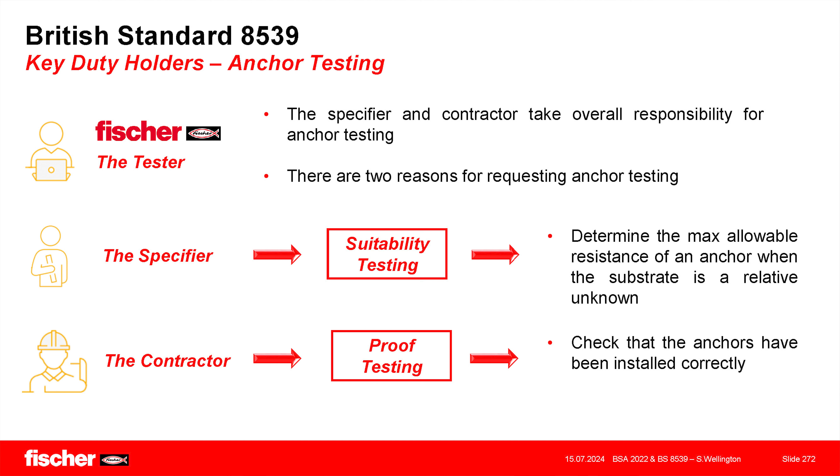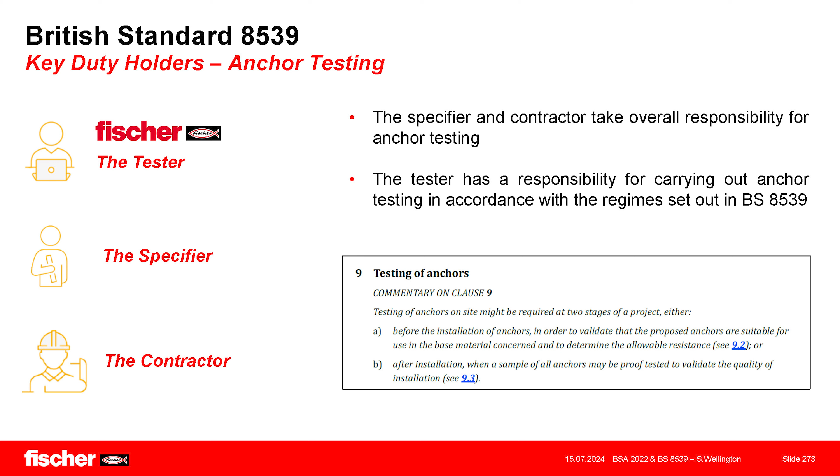For contractors, as they have responsibility for overseeing the installation, they will need to utilize from time to time what we call proof testing. So this is simply anchor testing to check whether or not the anchor has been installed correctly. All anchor testers have a responsibility for performing anchor testing in accordance with the guidance set out in British Standards, Section 9 and Appendix B.

The exchange of information between duty holders is key to successful implementation of British Standard 8539. Essentially, the standard will help create a thread through all the required actions to specify, procure and install ETA-approved anchors. Those adhering to the British standard will be achieving a gold standard of best practice and ensuring compliance with the new requirements set out under the Building Safety Act.

Hopefully, this video has been informative and helps you understand the new requirements for all parties regarding the Building Safety Act and how best to achieve those requirements utilizing the guidance given in British Standard 8539.